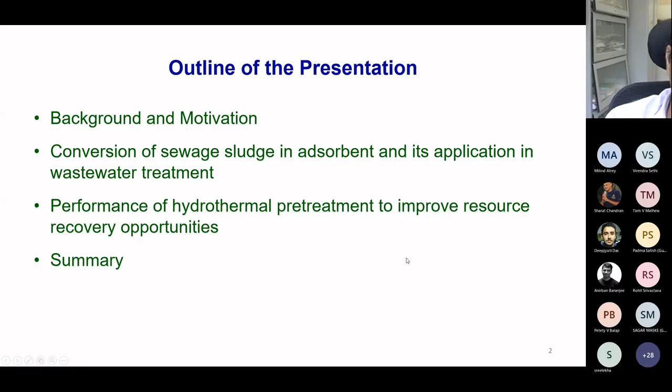In these papers, we try to focus on sewage sludge management, which is a byproduct produced from any sewage treatment plant. Its disposal is one of the major challenges before all the municipalities, and worldwide. It has been a big problem to dispose it in an environmentally friendly manner. Land disposal and anaerobic digestion are the two major disposal methods for sewage sludge, which are often not very effective. Anaerobic digestion is generally not very effective because sludge has a large amount of particulates, and solubilization becomes the rate limiting step during this process. Hence we have to find a sustainable and efficient method for the disposal of sewage sludge.

Among various alternatives, we focused on two methods. One is we converted this into adsorbent, because it is a carbon-rich material, so it can easily replace the activated carbon which is produced from natural resources, and its utilization in wastewater treatment.

The second one is we are pre-treating this by a method called the hydrothermal method. Because sewage sludge itself contains a large amount of moisture, we need not add any water externally, so this process doesn't require any water. After pre-treatment, we can separate out the solid and liquid phases, and then utilize these different phases for further resource recovery.

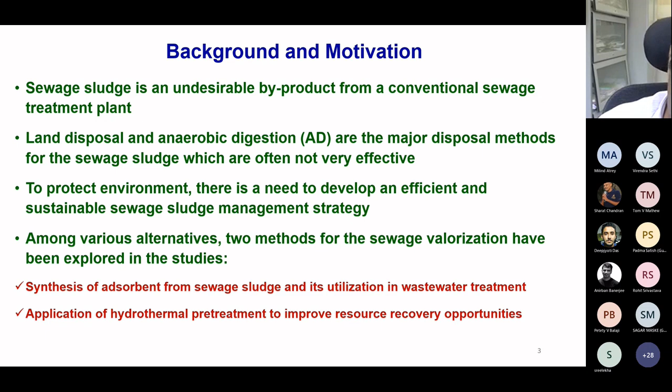Now, this is very basic information about sludge generation. In a sewage treatment plant, approximately 2500 to 3500 liters of sludge is generated, which contains only 3 to 7% solids. Secondary sludge is biological sludge generated after biological treatment. Primary sludge is generated after the sedimentation tank. We allow the wastewater to settle in a large tank, and the suspended impurities settle down. Advanced treatment depends upon the intention of wastewater disposal after treatment.

Sometimes we go for nitrification and denitrification, which can be a biological process, or for phosphorus removal, which can be a coagulation, flocculation process. So it can be a chemical process or a biological process. Here you can see that the total solids concentration is different in all types of sludges. So this is 3 to 7%.

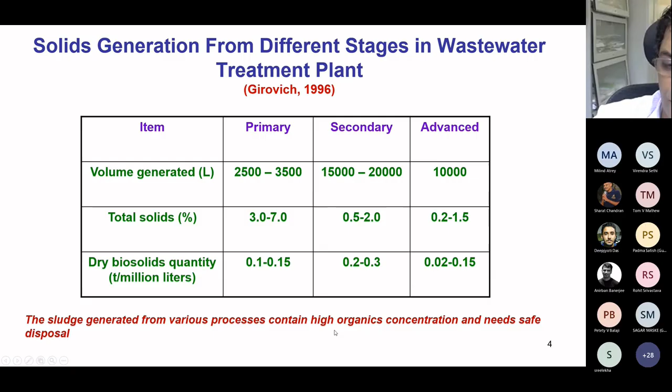So we can understand that though it is sludge, it is still a kind of highly concentrated wastewater. It is the dry biosolids concentration, and it is very difficult to dispose. Municipalities are facing a lot of challenges, as I told in the beginning. The total solids generated from various processes contain high organic concentration and need safe disposal. So I am talking about the first study, where we converted sewage sludge into an adsorbent and used it for wastewater treatment.

So it is a schematic diagram. So we got sewage sludge, primary sludge and secondary sludge from a running plant. And then we dried it. It is dried material that is shown here, but we activated this with ZnCl2. So we used a chemical activation process for this, and different ratios were used for sewage sludge to ZnCl2.

And then we optimized all these conditions. So I am just showing what were the best conditions that we obtained. Either of these two were found to be good, followed by carbonization in the absence of air to remove any volatile matters. Then the material after carbonization is washed with acid and distilled water to remove any salts and other impurities from the pores. And then the material was oven dried.

This is sewage sludge derived activated carbon, and its BET surface area was quite high. It is from 500 to 628 square meters per gram. So we prepared different types of activated carbon, so this is the area that varied.

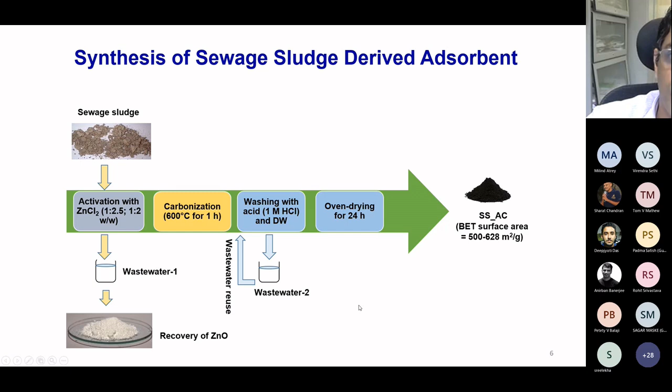And in the recent study, we also tried to recycle the wastewater which was produced during this process. So wastewater 1 was subjected to chemical treatment, and we tried to recover zinc oxide. And in the washing operation, wastewater 2 was generated, which was less polluted, and we tried to recycle it back. So in that manner, we were trying to reduce the need for fresh water in the synthesis process.

So this is the summary table showing the characteristics of various adsorbents. PS stands for primary sewage sludge. AS stands for activated sewage sludge or secondary sewage sludge, and GAC is granular activated carbon. These are different sewage sludge to ZnCl2 ratios, and CAC stands for activated carbon purchased from the market. It is peat derived activated carbon, and these were their BET surface area, pore volume and particle size range.

So we can see that the BET surface area was comparable to the commercially available activated carbon, and this is the granular activated carbon, because granular activated carbon is normally used in continuous studies. So therefore we also synthesized that. This is from the activated sludge.

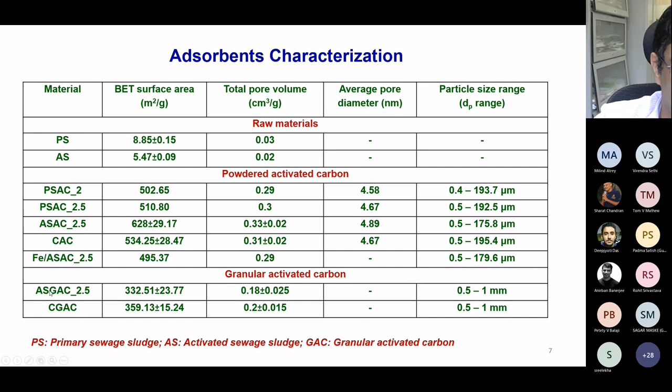Now these are some results that we obtained. We used ciprofloxacin, which is one of the antibiotics used widely, and it is found in wastewater. We used a synthetic wastewater solution where the concentration was 100 mg per liter, at neutral pH, with an adsorbent dose of 2 grams per liter.

We should note here that the performance of these waste-derived activated carbon samples was the same as that of the commercially available activated carbon. This qt is the adsorption capacity. That was around 30 milligrams per gram of activated carbon that could be adsorbed.

Now in the second study, we tried to prepare a Fenton-like catalyst. It is a heterogeneous catalyst where we used waste-derived activated carbon as the support, and iron was impregnated on it. In the initial stage, we did only the adsorption process, and then we added hydrogen peroxide. After this addition of hydrogen peroxide, we could get significant removal in the CPX concentration from the wastewater.

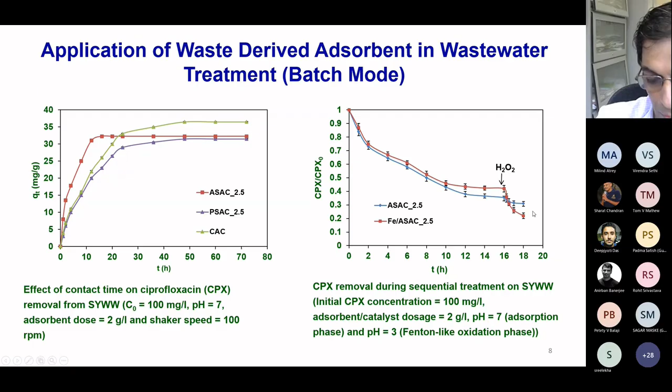And I am not showing here the total organic carbon, which tells us how much carbon is removed from the wastewater. In this process, ciprofloxacin may convert into some intermediates, so carbon is still present. TOC removal here was almost 60 to 70% when we used adsorption followed by the Fenton-like oxidation process. For this particular process, we reduced the pH to 3, which is the requirement. All these conditions were optimized using a design of experiments strategy.

Now, this is another study that we did in a continuous reactor. It's a very small continuous reactor where we varied several parameters. We used different concentrations of the antibiotic, 20 to 100 mg per liter, the bed height was 8 centimeters, and the flow rate was also changed. So here we saw the effect of the flow rate. This is with granular activated carbon derived from activated sludge.

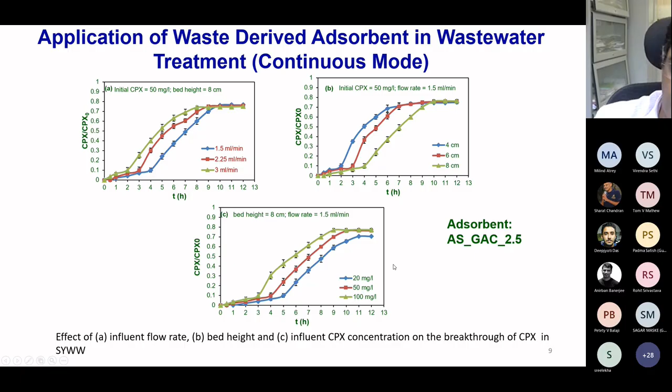So here we can see again that with increase in the flow rate, the equilibrium time is reduced. It reaches saturation, and then the concentration of CPX in the outlet increases very fast. So 2 hours is suitable when we are operating the system at a higher flow rate. And at a lower flow rate, the column can be used for a longer period, approximately 4 hours. So we saw the effect of various parameters on the adsorption.

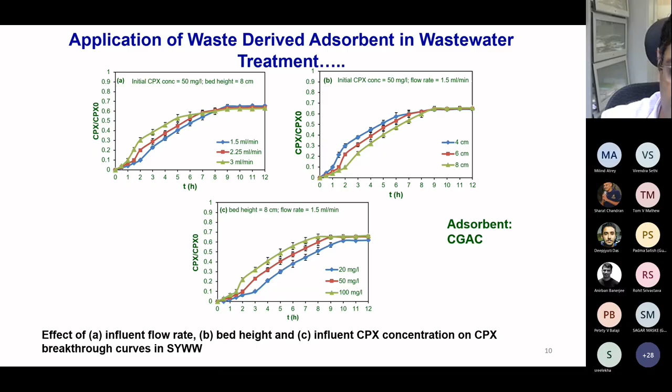So this is one of the applications. Because it is a waste-derived material, we cannot suggest it for water treatment; rather, it should be used for wastewater treatment. And in wastewater treatment, because the standards have now become very strict, we have to treat the wastewater to higher levels. Adsorption is one of the most effective polishing treatment methods for the removal of recalcitrant pollutants.

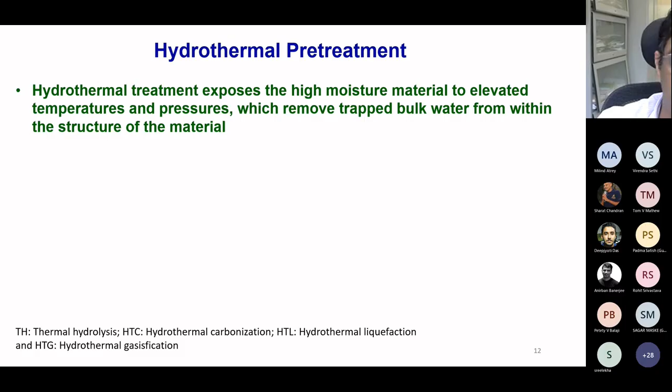Now I am going through the second study. It is on hydrothermal pretreatment to improve resource recovery opportunities. Hydrothermal treatment exposes high moisture material to elevated temperatures and pressure. Here we worked on two processes: one is thermal hydrolysis, the other is HTC, hydrothermal carbonization. They are carried out in the temperature ranges of 120 to 180 degrees centigrade and 180 to 240 degrees centigrade respectively.

With thermal hydrolysis, the purpose is to solubilize the particulates present in large amounts in the sewage sludge, and then we can go for anaerobic digestion, which will give us more biogas yield. HTC is carried out at slightly higher temperature, and we find two streams. One is hydrochar, the solid residue, which can be used as fuel as well as soil conditioner. The second is the liquid stream, which we can again subject to anaerobic digestion, and it also has some macromolecules which can be recovered.

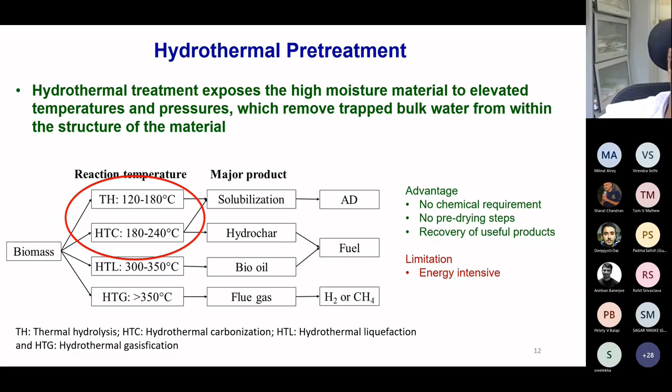So I will show in brief our results after HTC on sewage sludge. Advantages are no chemical requirement, no pre-drying step, and recovery of useful products. One limitation is that it is energy intensive, but we checked the energy requirements and found that for a 1 hour reaction we can maintain the temperature without a heater, around 190 to 200 degrees centigrade.

So here what we did, this is a graphical abstract. Last 2 minutes. Yeah, I will finish in 2 minutes.

So this is the graphical abstract. This is the aeration tank. We took this sludge and then it is centrifuged. After centrifuging, it contains 8 to 11% solid content, and it is subjected to hydrothermal carbonization in a high pressure reactor. We worked at 200 degrees centigrade from 1 to 8 hours. This is the process wastewater and this is the solid hydrochar.

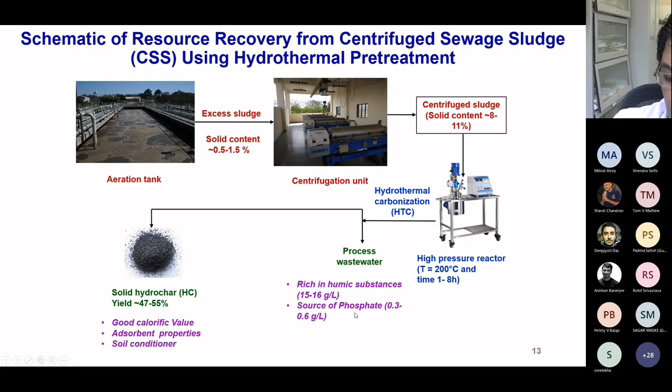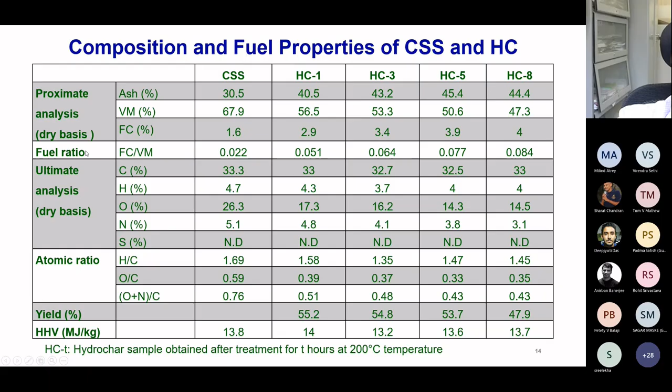The hydrochar has good calorific value but high ash content, has adsorption properties, and can be used as soil conditioner. The process water has humic substances and phosphate, a non-renewable resource, which can be recovered. Only one thing I wanted to tell: the higher heating value of hydrochar samples obtained after reaction at 1, 3, 5 and 8 hours was approximately 14 megajoules per kg, and it can be used as a co-fuel. But the high ash content is a problem.

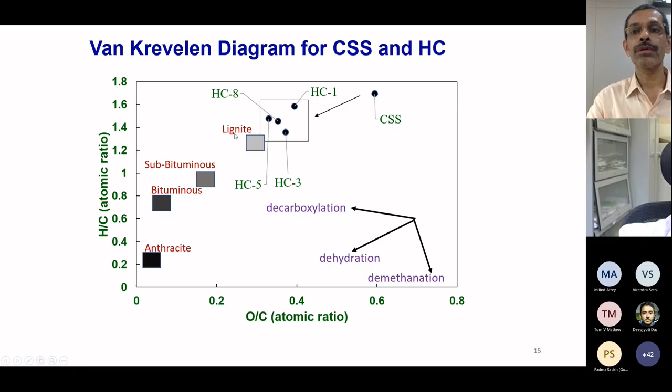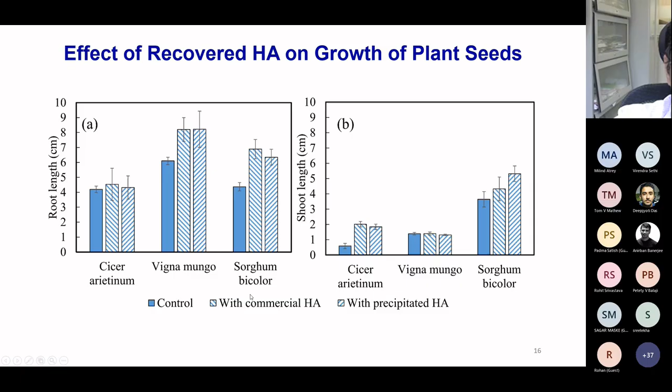High ash content is a problem, but if we compare based on atomic ratios on the Van Krevelen diagram, it is very close to lignite coal. Next, we used humic acid recovered from the liquid fraction for the growth of plant seeds. We used 3 different types of seeds: chickpea, urad, which is a pulse, and millet. We saw no adverse impact of using this humic acid, and it shows similar results to the commercial humic acid that we also purchased.

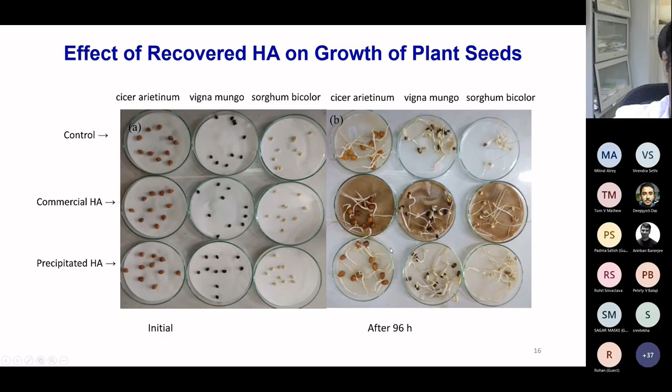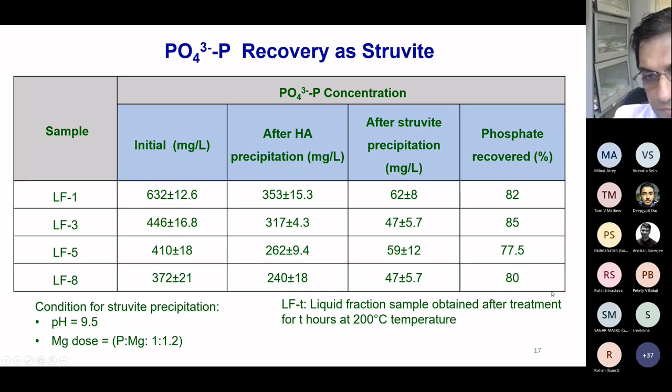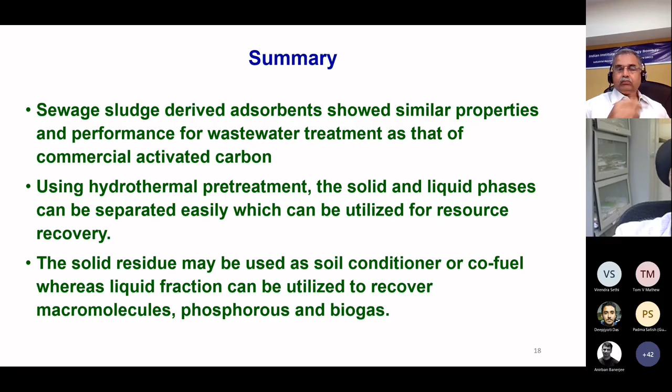So sewage sludge derived adsorbent showed similar properties and wastewater treatment performance as commercial activated carbon. Using hydrothermal pretreatment, we can separate easily for resource recovery, and it can be used as soil conditioner. It is one of the major fields of research where we have to demonstrate and study more. One more thing: for this process, we are asked to set up 2 small scale plants at running sewage treatment plants based on hydrothermal pretreatment.